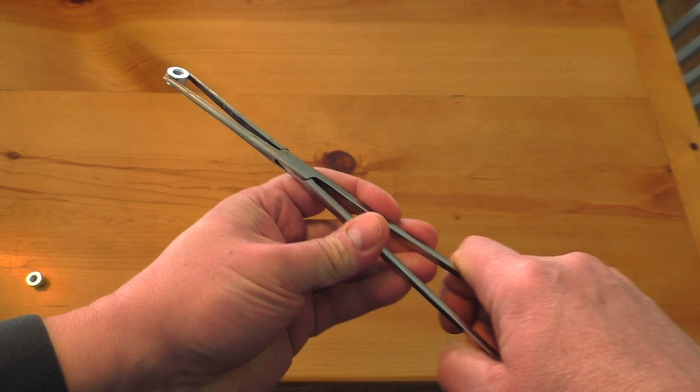But these are great because what they've done is they've taken the function. There are two functions that these things have, and they've taken them and separated them. The first function is actually holding a part. Like if you put a nut in like this, for example, you would hold it and you have to grip down here normally. And in the process of doing that, you're applying force here to grip the part, and that makes it hard to position this thing because you're squeezing, and squeezing here doesn't make it easy to position.

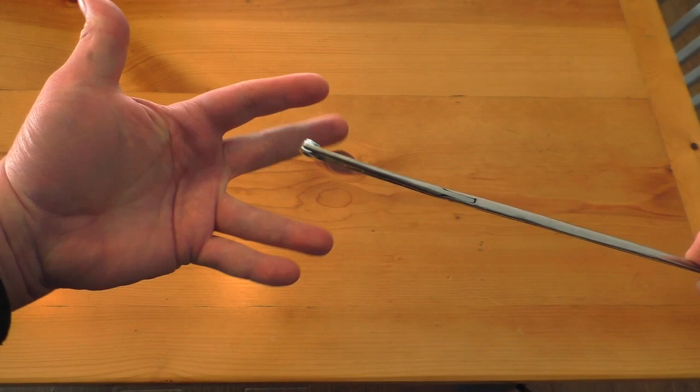But these have this function. They lock. Now the nut or whatever it is, the bolt, the screw, the seal, whatever you're doing with this is locked in, held firmly. And that's great because now instead of having to squeeze this while you're trying to delicately slide this between two things, you're not squeezing anymore. You can use just your fingertips to very delicately fit it in between something. And it's that separation of function, the gripping and the positioning, that makes these so great.

These are pretty big ones. I think these are about 12, 14 inches long, and you can get them at Harbor Freight. I don't know that they call them hemostats, but they are excellent for this purpose. Now, they also work, you can even put a large nut in. This is what is this, half 13? No, this is 3/8-16. And even something that large, they flex enough to hold that and allow for me now to just position it with a couple of fingers. I don't have to grab and hold this.

There are other tools that do this as well. Certainly there are other sizes of hemostats. Here's some small ones that I have. And these are good for working on cameras and things that are even tinier. These, for working on cars, they can help. But I think this size is even better. Reaching under a dashboard or down between the manifold and the firewall or whatever to get something that you've lost, to hold something while you tighten it.

And you can see they make them in different styles. These are bent. These are super convenient, the bent tip. And there are some they're bent even more, and then some that are, instead of straight, they're bent down, and there's all kinds. And I'm going to get some more. I suddenly realized I only really have these three. So there are other tools that do this too.

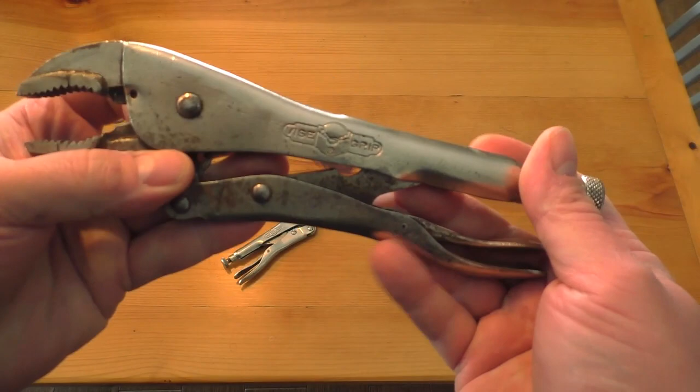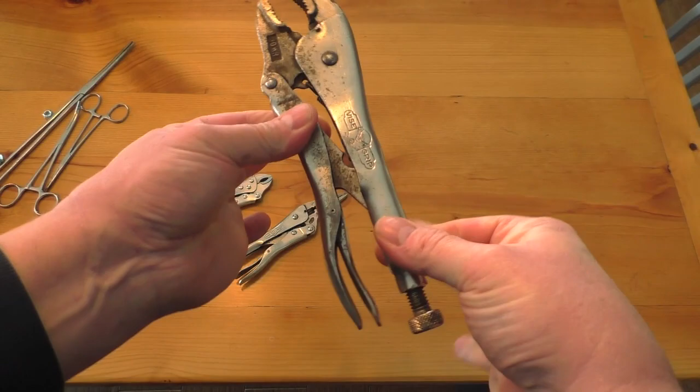For example, Vise-Grips. Vise-Grips, I guess, are a brand of locking plier, and these actually say Vise-Grip on them. But these lock onto a part, so you can separate the gripping with the positioning. And you got to have a bunch of these. They're excellent. Needle nose. These have gotten me out of a lot of jams because sometimes you can't fit the big ones in. You just need something small. So these are excellent too. And this one I just used to hold a GoPro under a car, this tiny one. I'm finding tiny tools like this that are well made are more and more useful for some reason.

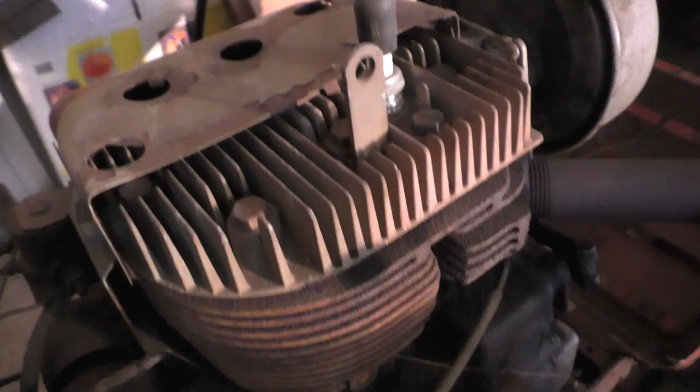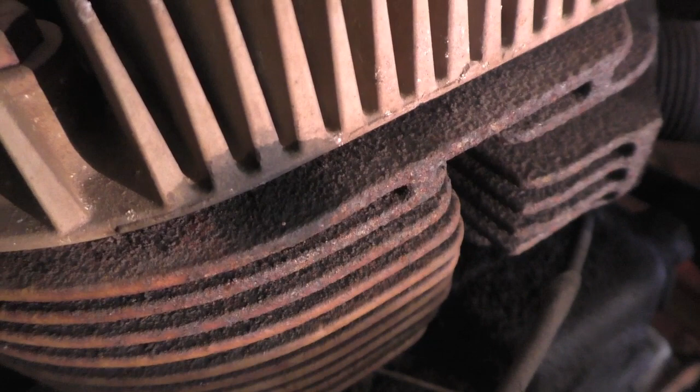So here's the Kohler, 12 horsepower Kohler. I'll put the model number on the screen. It's a single cylinder engine that's on this Wheel Horse C120. The head, actually, you can see this black coloration right here. And when I was trying to get it started the other day, I finally did get it started. I noticed black sooty exhaust shooting out this area here. And so I think that I've got a bad head gasket. I'm hoping the head isn't warped or cracked or some other problem.

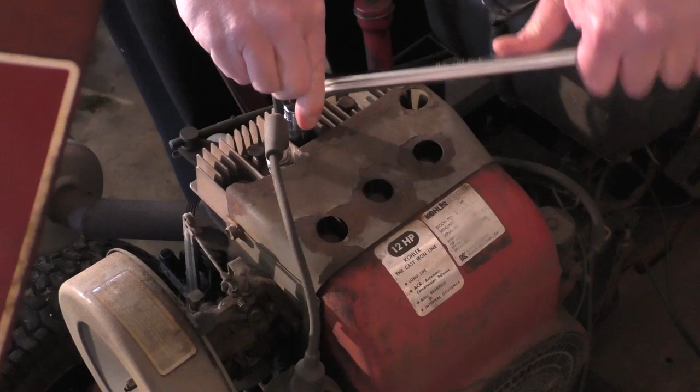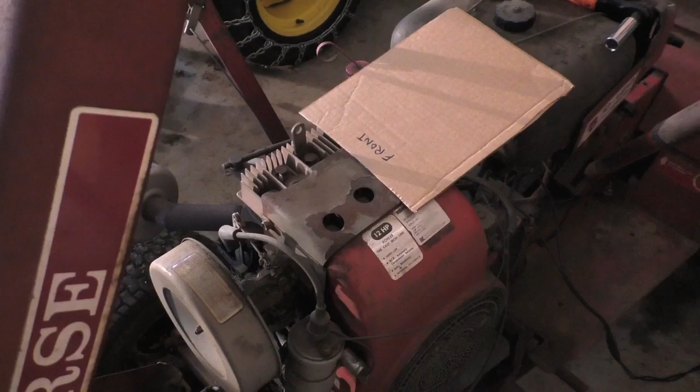Wow, relatively easy. I've heard that it can be a good idea to take bolts like this off with a rattle gun, but I wanted to see just how tight they were, and these are surprisingly not torqued down. Now I'm using my breaker bar, but there's not much happening here. I mean, wow. I suppose these have never been torqued. They probably are supposed to be retorqued. Let me get the plug out. Very sooty. Okay, it might be that all the bolts are the same length, but in case they aren't, I'm going to make up this little holder for them as I go along.

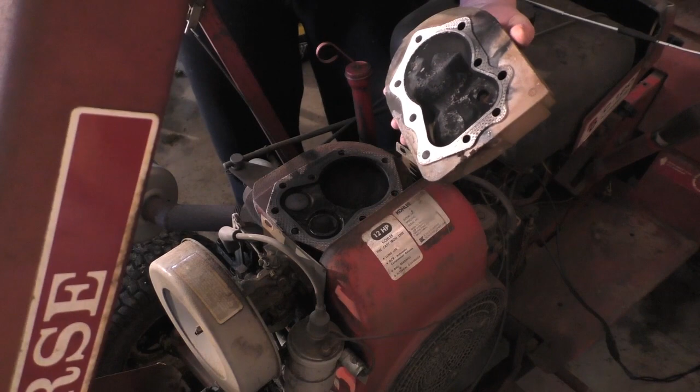Yay, it comes right off. Now let's see what we got here. Wow. Let's see if you guys can see that. I'm going to be careful I don't drop this. You can see all the black around the thing where the combustion gases were escaping. Pretty extensive.

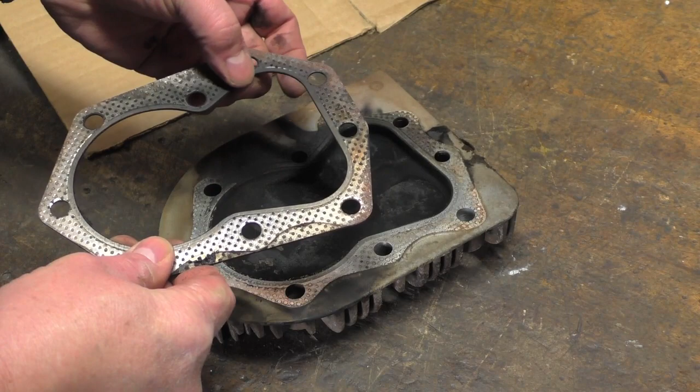Here's the gasket, which I have to say looks like it's in very good shape. I think this head simply needed to be retorqued. I mean, it seems very good. You can see where the gases probably escaped right there.

Let me bring this up. And here, where it's all black, it should be shiny like this all around, and not black where the gases escaped. You can see they came flying out here. And then the head itself really tells the tale where it came out.

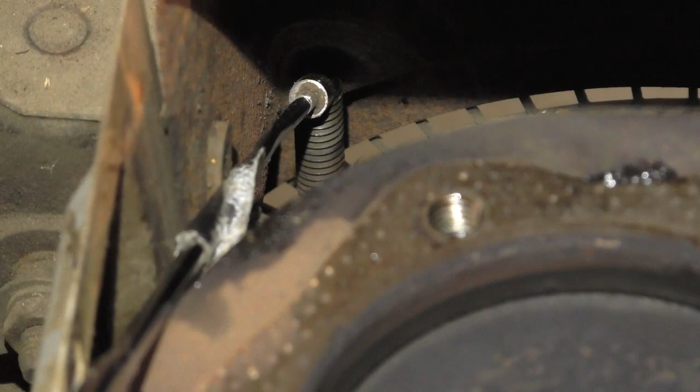All right, I'm going to clean this and check it, but before I do, I'm going to do what I think is the hardest job of all, which is retrieve that bolt that I dropped down into the fan housing. Oh boy, that'll be fun. Okay, it looks like, fortunately, the bolt is right there. And with a little bit of luck, maybe a lot of luck, I can get the magnet in. Bring it out. Come on now. Oh.

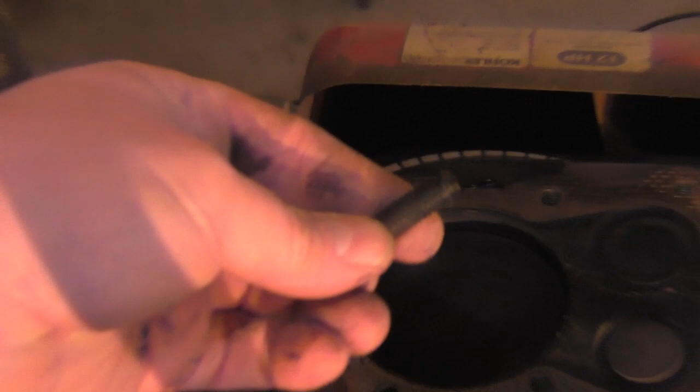Yes, Bart Simpson. Good, I didn't want to have to take that whole side cover off to get that bolt back.

Phew! Okay, we're back with the head itself. And the question is, how flat is this? I think I'm just going to clean this up with Scotch-Brite. And maybe first, a brass brush, a soft brush. I don't really want to scratch anything up. This actually looks pretty good.

The gasket itself, I think I'll clean and keep, but I think I'll use the other gasket. Let me show you the other gasket that I got. Here's the one I got in preparation for this job. That looks like the right one, all right. So it cost $9, I think. $10 with the shipping.

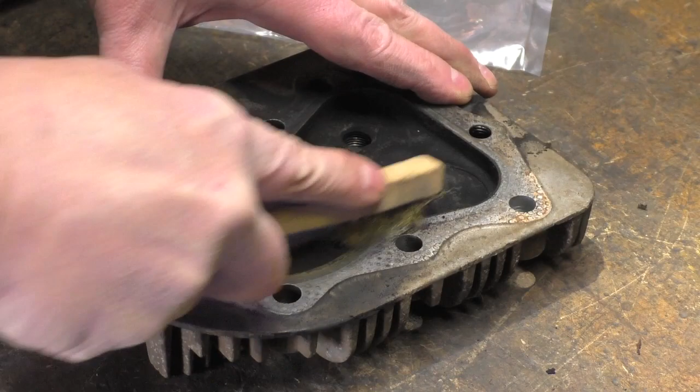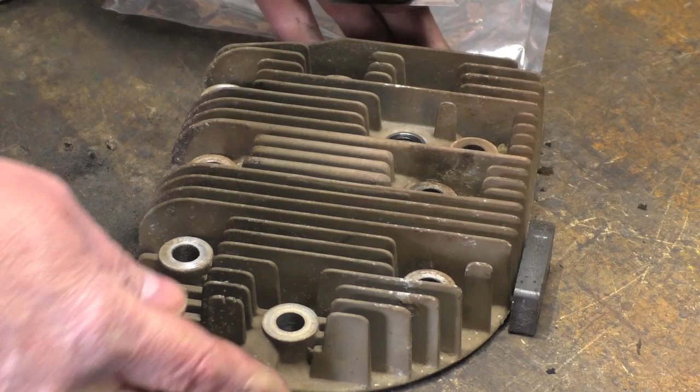So it's a brass brush. It's very soft. So I think the head is cast iron and much harder. Although, yeah, that's cast iron. Here's a magnet. Wait, that might not be cast iron. That might be an aluminum head. Let's see. Yeah. Aluminum or magnesium. So I gotta be careful not to scratch it. I'm using this soft brass rather than a steel brush.

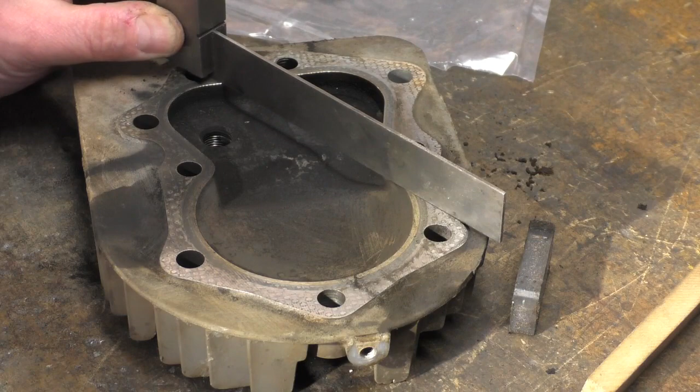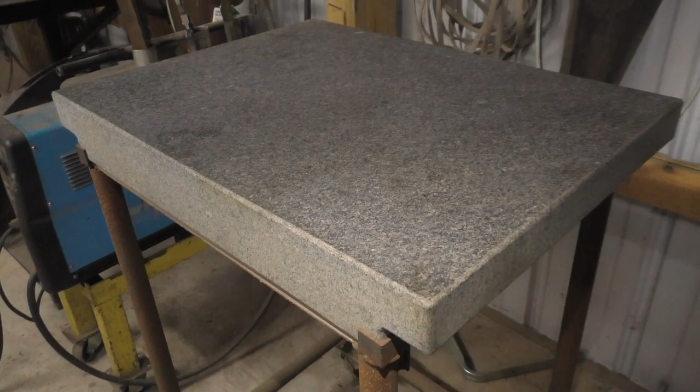I feel like it's in very good shape. It doesn't seem warped at all. So this is my granite inspection table, and it's very flat. It's a very flat piece of granite. I don't know how accurate it is, but you know, to 1/1000th of an inch probably from here to here or something like that.

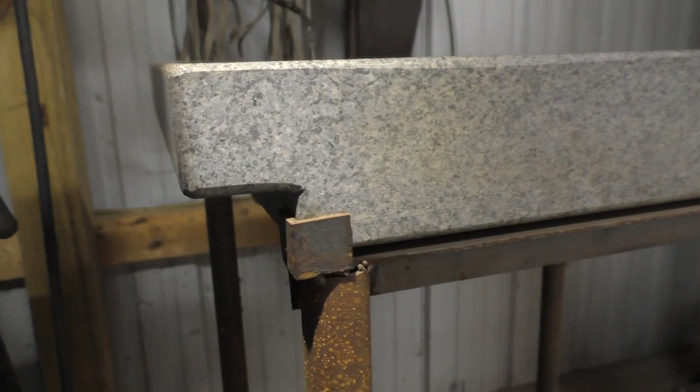I've hardly used this in the last 25 years. I bought this thing to build stuff for a movie called Titanic. And I did use it a little bit for that movie, not much. And I built this big stand for it. And there's a cover that goes over the top to protect it. And I've even supported it at the edges with a rubber pad and the correct way and blah, blah, blah. I'd like to use it more, do more sort of Mr. Pete Tubal-Cain stuff with it. Maybe I will. Anyway.

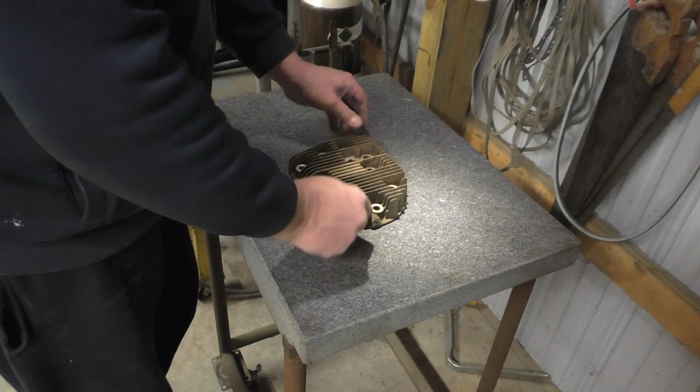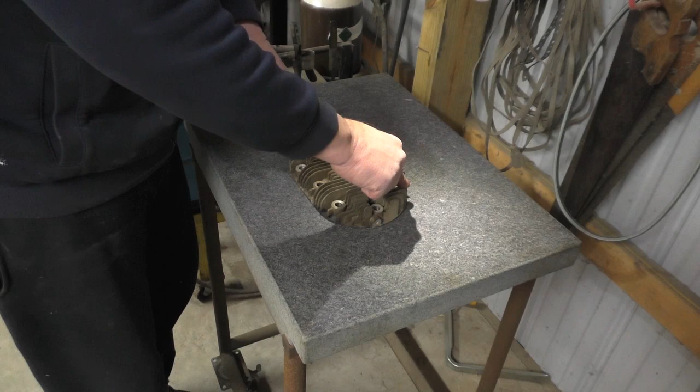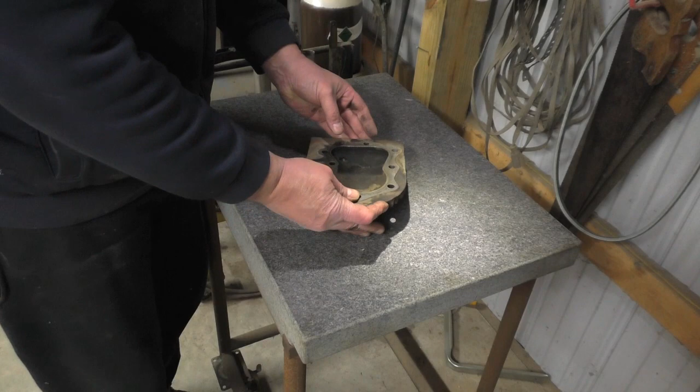Almost no rock at all this way, like nothing. I mean, I'm hearing something, but I actually don't feel anything. From here, a couple of thou. So this is, I think this is very good. I'm feeling a ridge here. And right around that ridge, the outside of that ridge is where the gasket goes. So I'm feeling pretty good about this going right back together.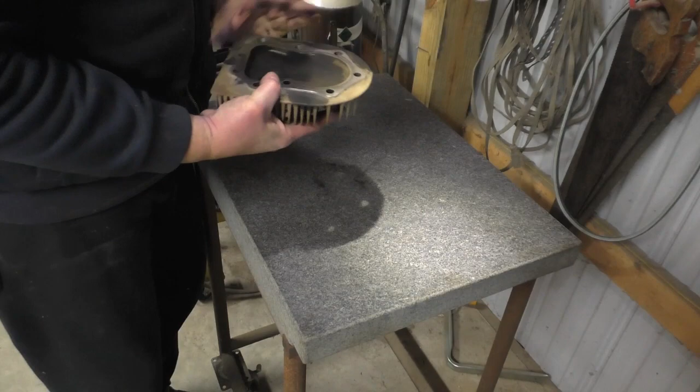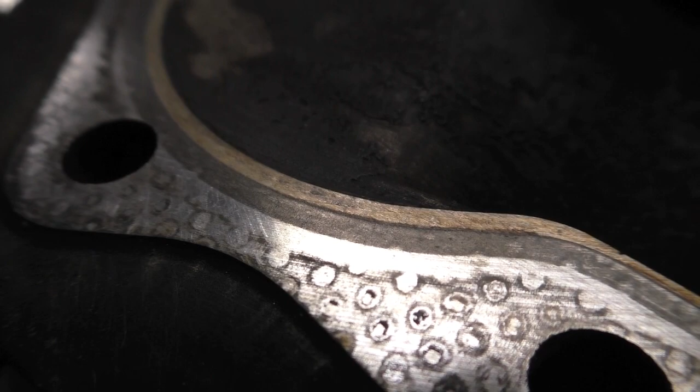I could put sandpaper on here and do a figure 8, take that ridge off. It looks to me like there's a very fine ridge here that's been pounded into the head. And I'm going to look at it some more, but I think that gets thinner, goes all the way around, and it matches the old gasket.

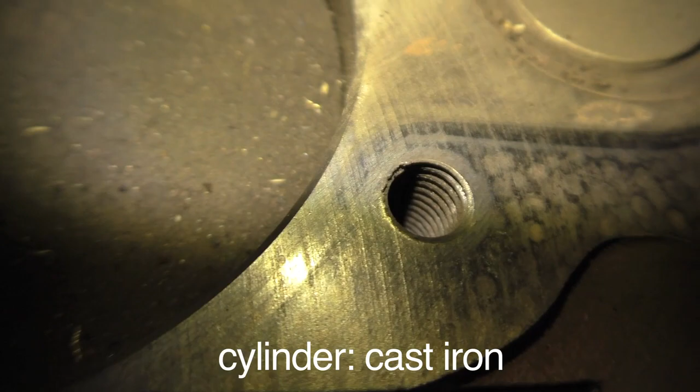You can see the lines running vertically. Those seem to be the old fly cutter. And I don't see this ridge like I see in the soft aluminum. There's the fly cutter lines going right through. So yeah, this actually looks very good. I'm going to clean it up some more, and I'm going to sand the head down on the reference granite and put it back together.

Looks like my battery is going, but this cleaned up very nicely. That's 150 grit sandpaper. Let's see. So I'm getting ready to put it back together. Let's turn the light on. I'm curious to know the condition of the engine.

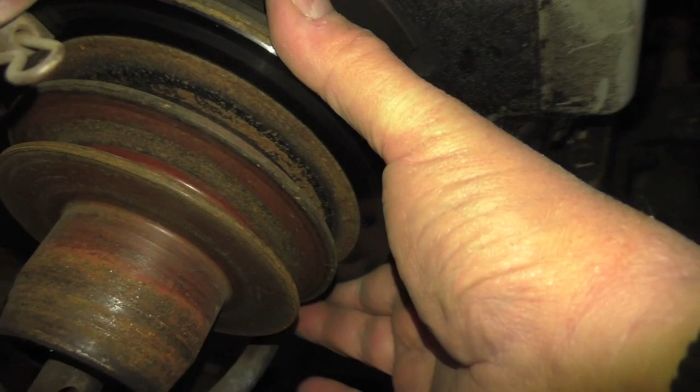The piston isn't moving in the bore at all. Now I'm going to go down here and crank the engine over, see if I can get the piston to move, and I can examine the, I know, I'm trying to do this one-handed. I can examine the bore. Boy, that feels just great. You see the reflection of my finger off of it. Going all the way around, very smooth.

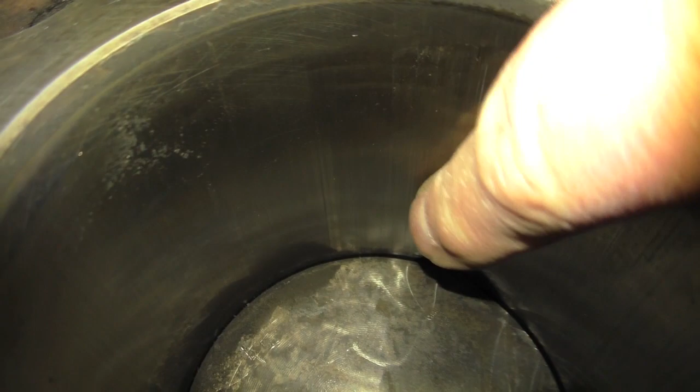There's a bit of a ridge here, which I imagine is to be expected, but that's okay. But, by golly, if I can get some reflection going. It's very smooth. A little bit of scratches. This is great. It feels really good. So cast iron, I think, is what's going on here.

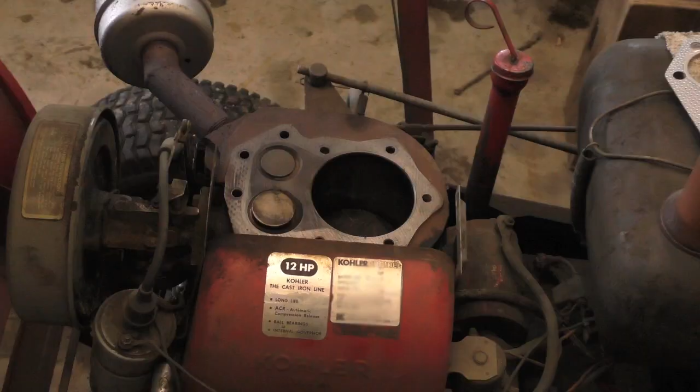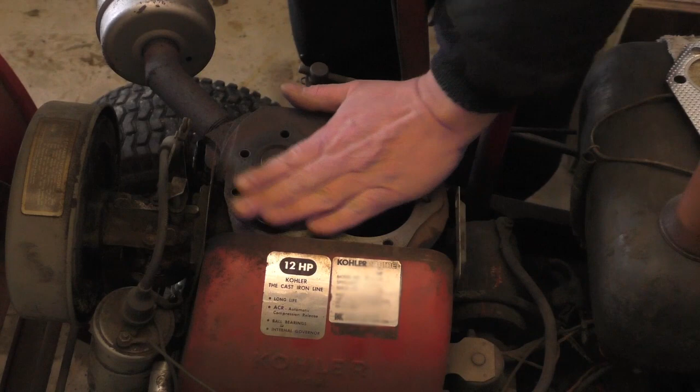All right, now time to put it back together. We go to the other side. Now I'm on the other side. Yeah, I used a little bit of Scotch-Brite that I had laying around just to clean up, and then ran my finger over it. I've seen people sandpaper this, but I think that's a little bit excessive. I could put a stone across the mount here, but the valves are in the way, so I'm not going to stone it. There you can see the intake valve going up. I guess I'll leave it like that.

Make sure I don't have anything on here that could get trapped. I think I might wipe this down with a little brake cleaner. Stand by. Very good. This way we just make sure. All it would take would be a little bit of grit, something hard to get wedged where the gasket goes, and then you wouldn't have a good seal. So that feels fine. Okay.

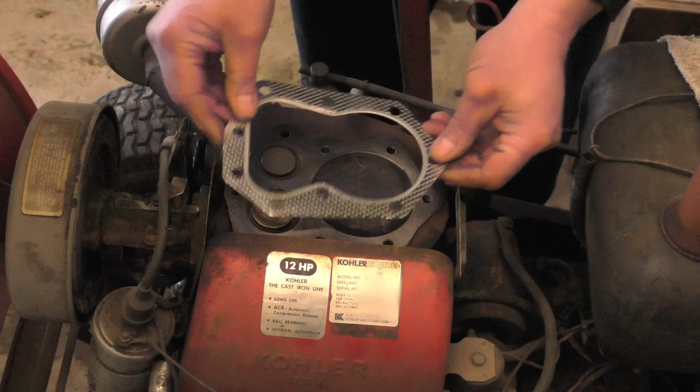Gasket goes on. Feels good, no grit. Let's see, is it this way? It is not that way. It must be this way. It is that way. Now, the other thing is, I'll cover that up.

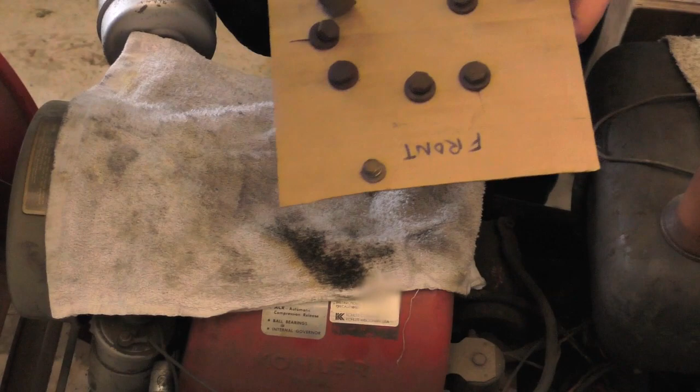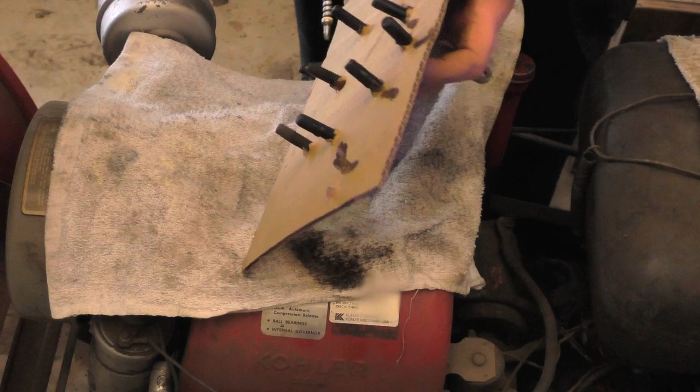Here's my cardboard with all my bolts on it, and one of the things said, put a little oil on each one for proper torque settings. I'm putting motor oil. Actually, I think this is 10-weight machine oil. It's a little thicker than motor oil. I'll put that on each one so I get a good torque reading.

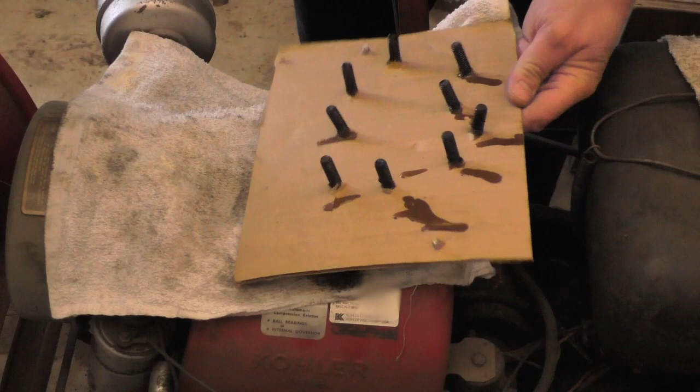I guess if they're dry, you have more friction, and more friction means more turning force. So maybe when they're lubed like this, you actually get a higher clamping force from the same torque setting on your torque wrench. Okay, now I need to get the bolt tightening sequence figured out, but I'll put the bolts in, then I'll go get the sequence. Okay, looks good.

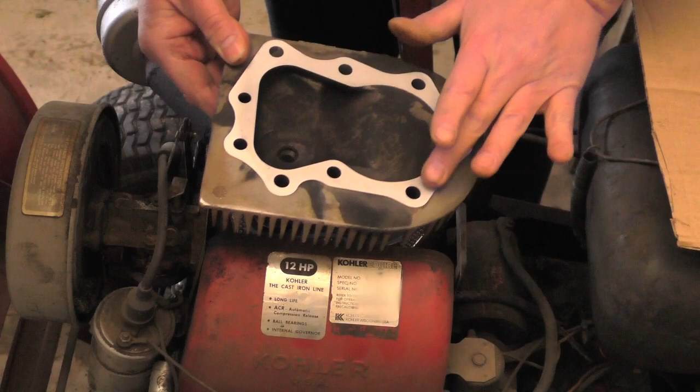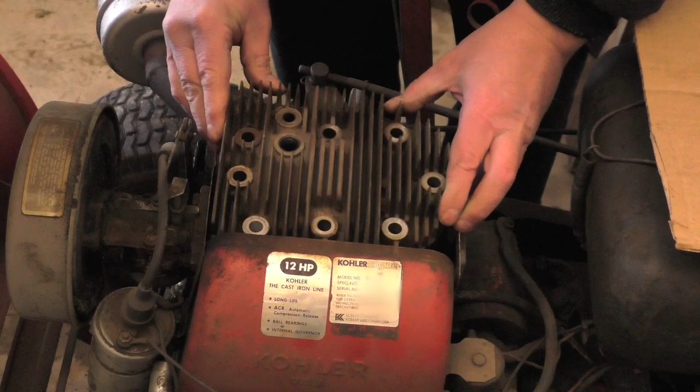This comes off. Once again, we're going to feel everything to make sure it's smooth. And here's the head that you saw me work on the granite. Feels very good. Okay, this goes on. It must go on like this. Line up all our holes like that, like that.

Feels like that got moved a little bit. I'll try and get this as close as I can. Bring it in. Let's see, here and here. Okay. Now we go ahead and drop our bolts back in. There we go. Good. Just pulling those off the cardboard. And the last guy. This has that thing on it.

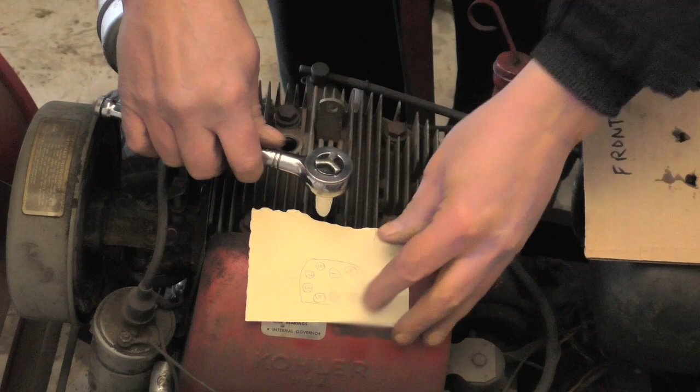Let's see, if I put it here, I can still see it. Okay, one, I'm just gonna do these till they're just snug. 1, 2, that one was already tight, so let's loosen it. Make sure they're all loosened. This is probably overkill. I would imagine the bigger the cylinder head, the more important the bolt pattern is. This is a pretty small cylinder head. It's only one cylinder, so okay.

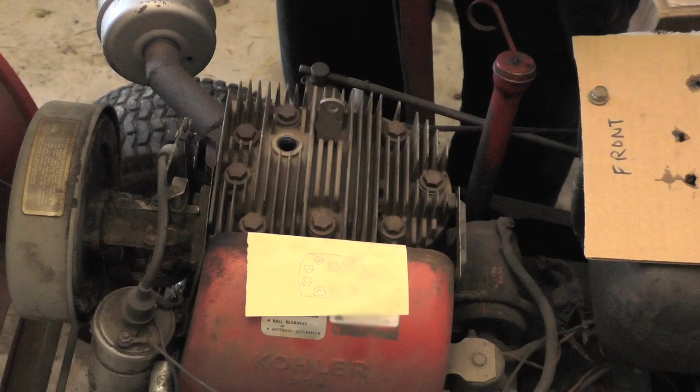1, 2, there's 3. 3, that's interesting. 3, 4, 5, 6, 7, 8, 9. Do that one more time. 1, 2. I missed 3. I'm going to do that over again. I mistook 3 for 5. How about that? I don't think it really matters. Just being overly cautious here.

All loose. All right. 1, 2, 3, 4, 5, 6, 7, 8, 9. Okay, we'll switch over to the torque wrench. 360 inch-pounds. I'm just going to advance this a little bit, but not quite do the click yet.

3, 4, 5, 6, 7, 8, 9. Okay, now let's go a little farther. 1. Yeah, this is much greater than what I'd done before. 7. Wait, 1, 2. What was I doing 7 when I wanted to do 3? Three, 4, 5.

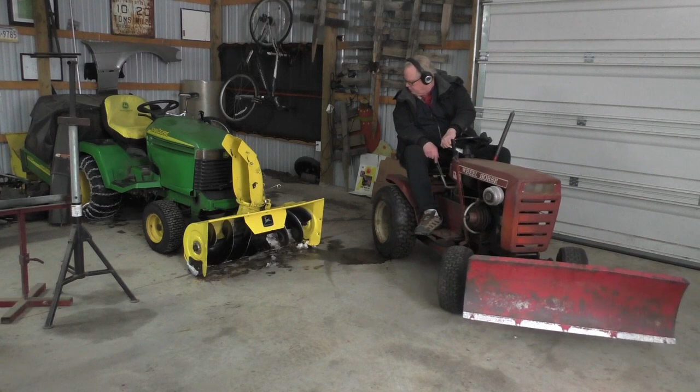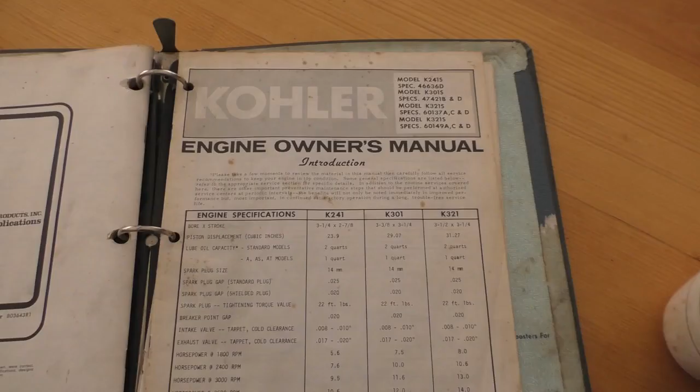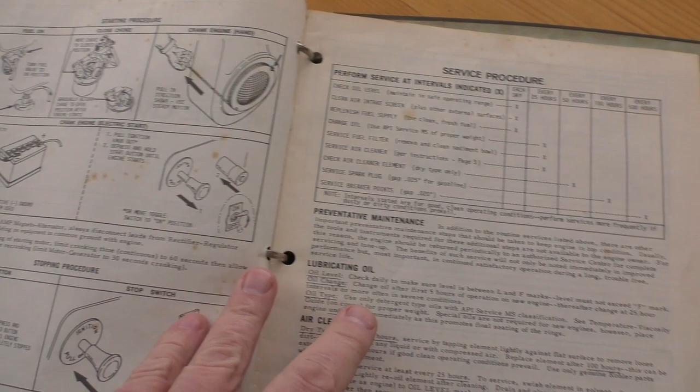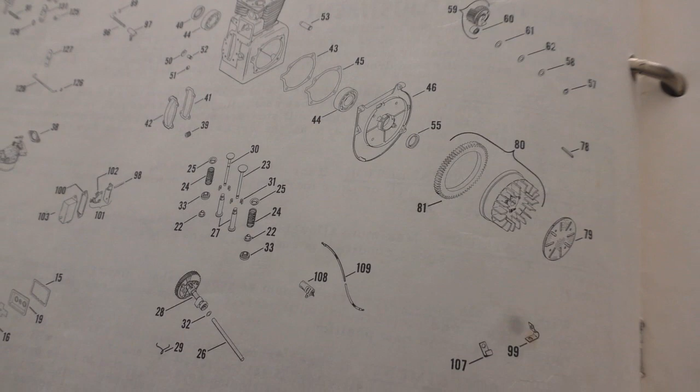Here's the Kohler engine owner's manual, all the specs. And the question is, would I have done this over again? Well, you know, if I had to mow the lawn or push the snow out of the way and I saw the exhaust gases shooting out from the side of the head where the head gasket is, knowing what I know now, I think I would just tighten those head bolts. I would find the torque specs and the torque diagram, and tighten the head bolts down and see if that would have solved my problem.

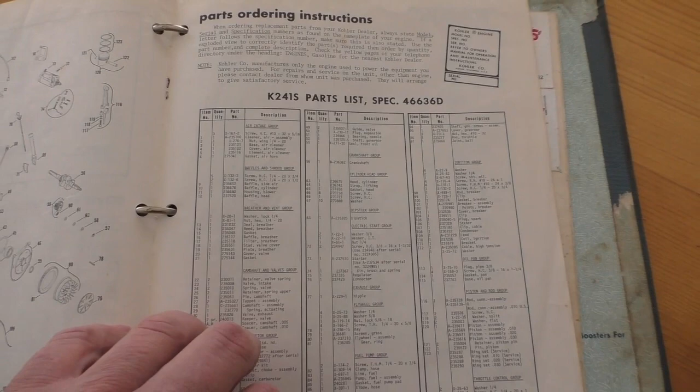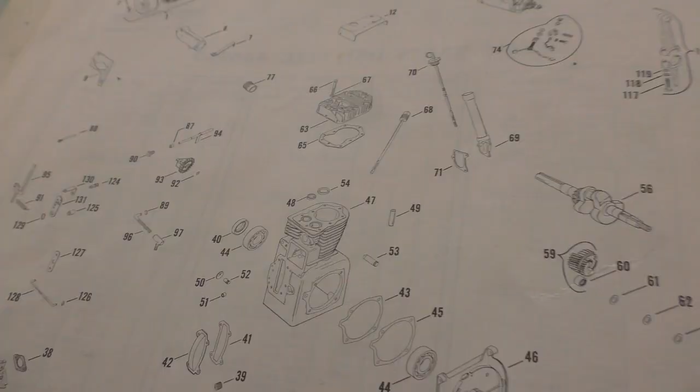And I think it would, and I don't think it would have caused an issue. But I'm glad I actually replaced the head gasket, sanded the head down, took it all apart and looked at everything. I learned a lot. One of the things I learned was that I maybe didn't have to do it that way. But this way I know that the head gasket is new and everything's torqued down. And boy, that engine runs really well now.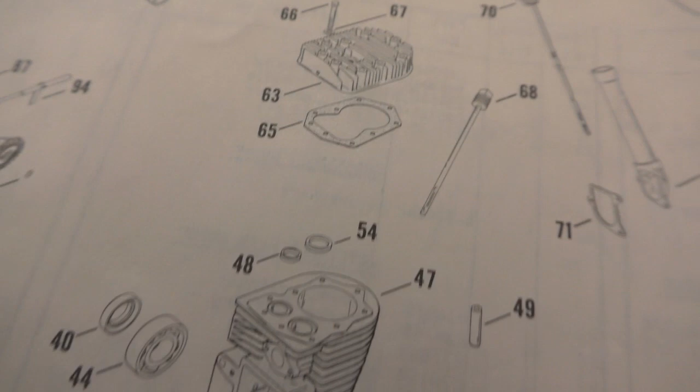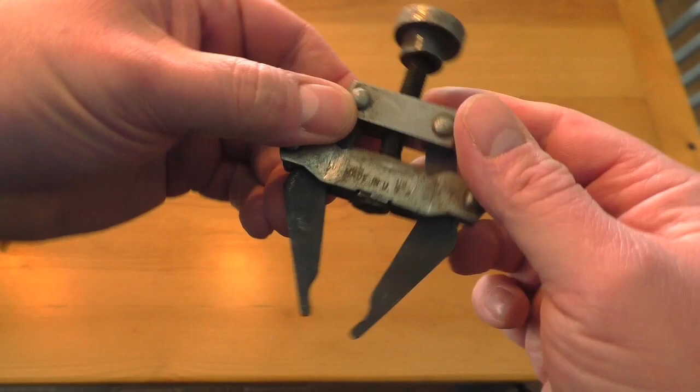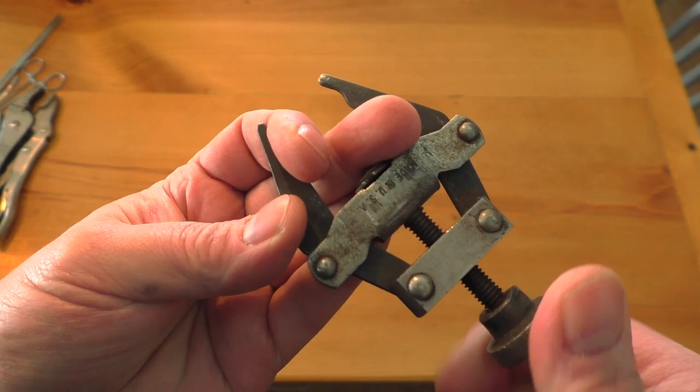So, here is the tool for next time. What is it? What does it do? What is it called? I don't know what this thing is. I get what it does. You tighten it, and these things pinch together. I'm guessing this is an automotive tool. I'll go to a garage sale and buy a whole box of tools for $5, and I won't know what every tool is, but this was one of them. And maybe you in the comments can tell me what the heck this is. I'm thinking it has something to do with battery terminals, but it doesn't make a lot of sense.

It may be that if I do a search with KD tools, which is one of those specialty tools that you find at the auto parts store, usually a rack of them that help you do specialized things on your car, that might turn up something. Anyway, here's the tool for next time.